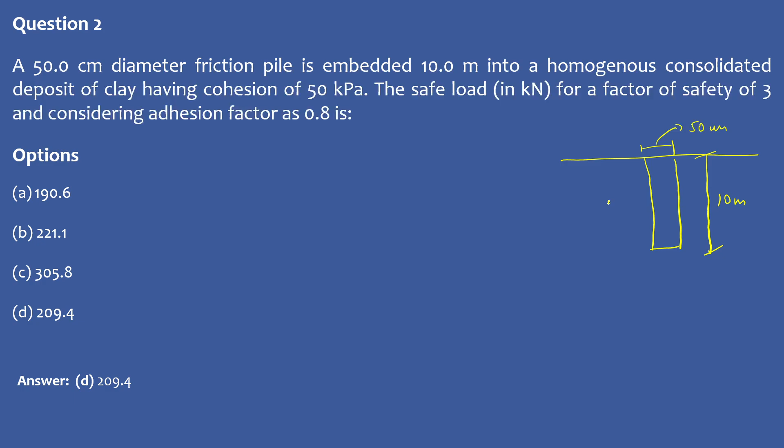So the case given to you is your pile foundation, which is embedded up to a depth of 10 meters. Here you are having a 50 centimeter diameter. The factor of safety given is 3, and your adhesion factor alpha is 0.8.

So usually the pile capacity is given to you as alpha. You need the safe load for the factor of safety. So it is given as alpha times cu times your surface area. So this is your pile capacity, P ultimate.

So alpha has a value of 0.8, your cu value is 50. Then you need to consider the surface area, given by 2 pi r, so which is pi into d, and d is 50 centimeters, so it's 0.5 meter. Then length is 10 meters.

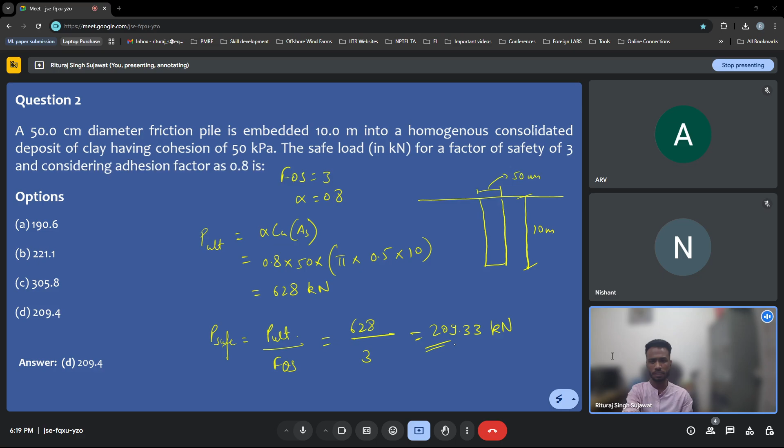So P safe is your corresponding value of 209.33 kilonewton. So this is your answer. Let's move to our next question.

For designing end bearing piles of a square cross section in clays having average unconfined compressive strength of 100 kPa, the net ultimate bearing capacity is... So one piece of information is it's an end bearing pile, resisting load from tip resistance. The cross section of the pile is square. You've been given the unconfined compressive strength, and accordingly you need to calculate the net ultimate bearing capacity.

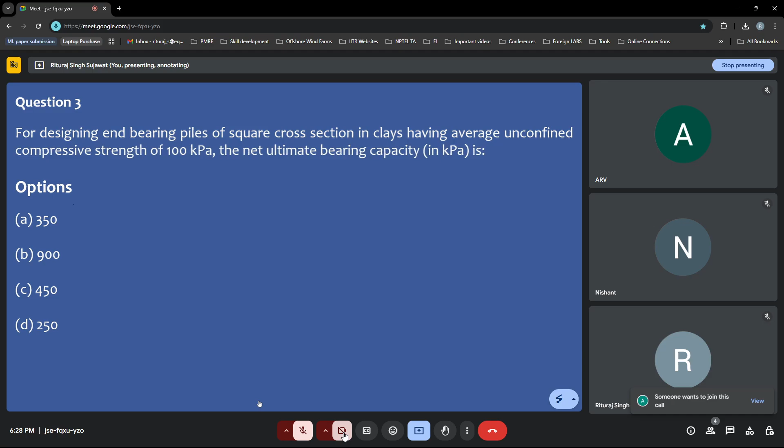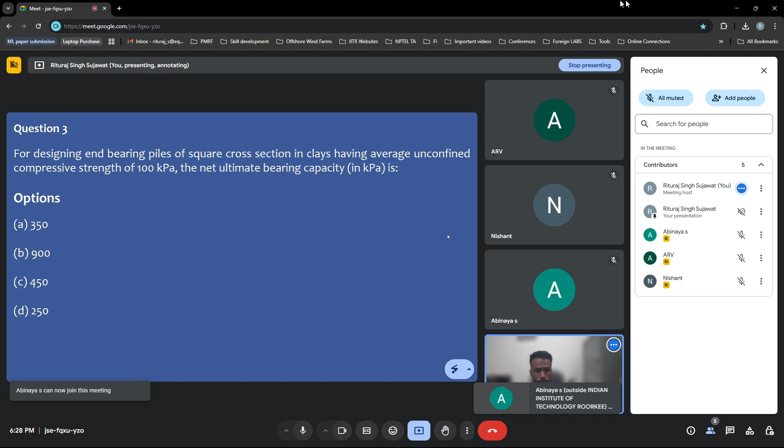Sorry for the delay. Let's check the answer for this question, which is 450 kPa. You have been given cohesive soil with unconfined compressive strength of 100 kPa. So your undrained shear strength Su will be 100 by 2, which is 50 kPa.

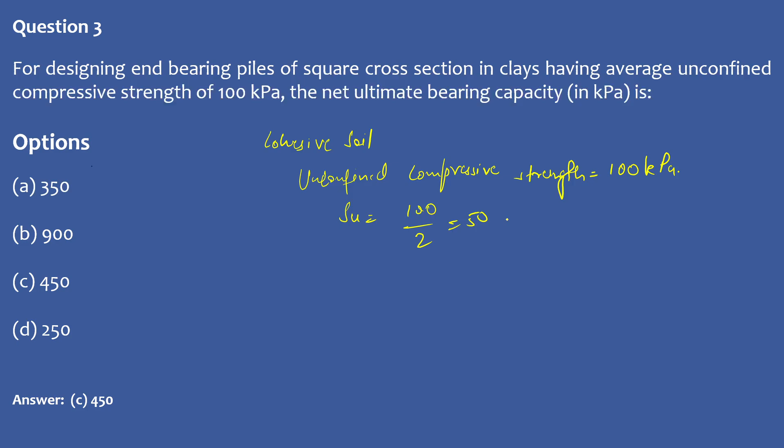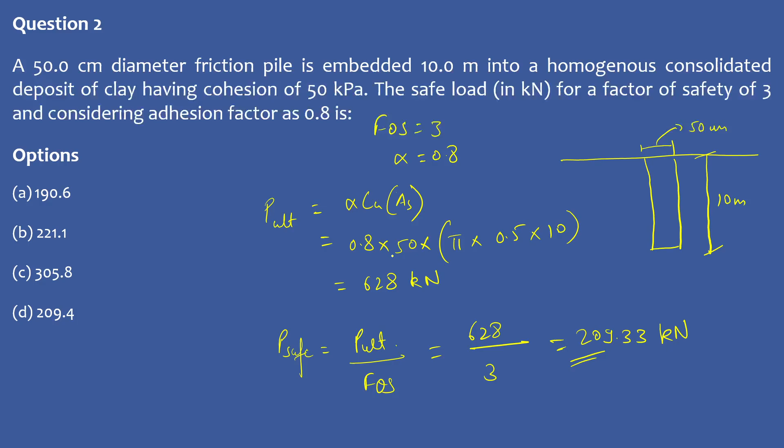The net ultimate bearing capacity, let me check the dimensions - square cross section with net ultimate bearing capacity. So Q is basically C times Nc. The Nc value we know from the previous part - the bearing capacity factor for piles is generally taken as 9.0. So your Nc value is 9.0 and C is 50. So your answer will be 450 kPa, which is option C.

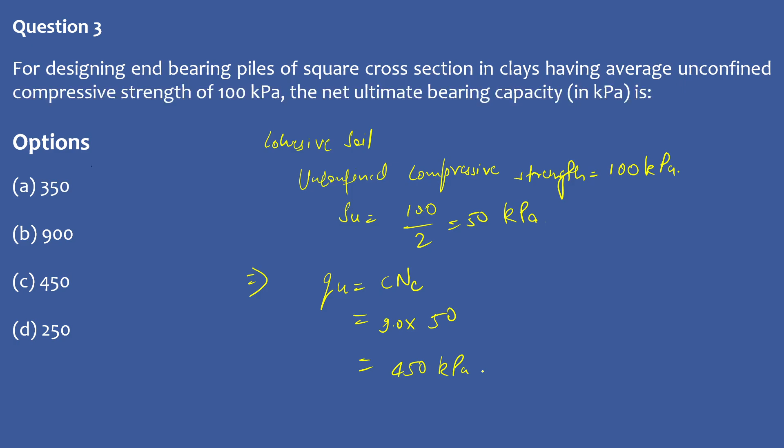I think this is straightforward. So let's go to the next question.

Next question: you are having a pile which is 10 meters in length. The diameter is 0.5 meter and it is installed in stiff clay soil. The Cu value given is 100 kPa, and the adhesion factor value given is 0.8. The pile load capacity furnished by friction only - you need to calculate what is the pile load capacity.

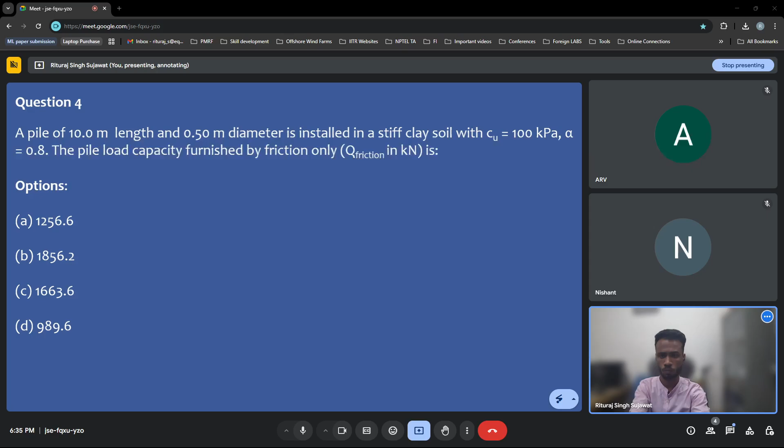Question 4A. Question 4.

It has been asked to calculate the capacity corresponding to the shaft friction. The correct answer is 1256.6, so option A. Let's check this - say this is your pile when subjected to some axial load. These are the tractions available at the surface of the pile and soil, corresponding to the shear stresses developed. We need to calculate the capacity provided by these shear stresses.

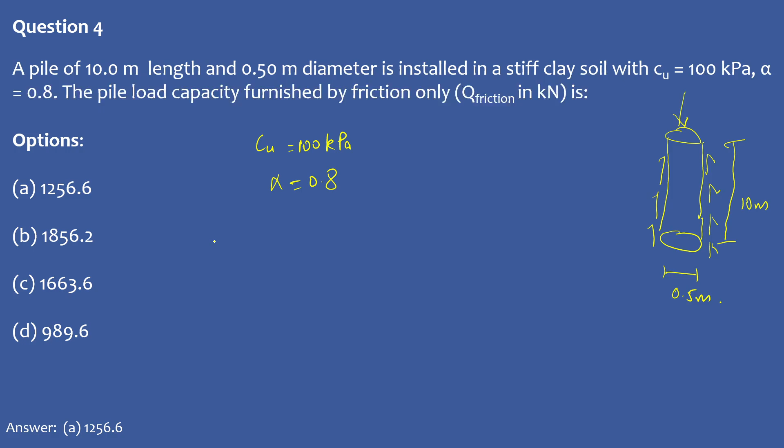So this is the Cu value, alpha is 0.8, the pile load capacity. We know the capacity corresponding to shaft friction is given by alpha times cohesion value, multiplied with the area of the shaft.

So this is alpha Cu S. Alpha is 0.8, Cu value is taken as 100, and area is calculated as pi D into L. So alpha is 0.8, Cu value is 100, pi value is 3.14, diameter is taken as 0.5, length is taken as 10 meter. So it's 0.8 into 100 into 3.14 into 0.5 into 10, which gives 1256 kilonewton. So the correct answer is A.

Let's move to question number 5. For the data given in question number 4, you need to calculate the ultimate bearing capacity of the pile, assessing it for the same data.

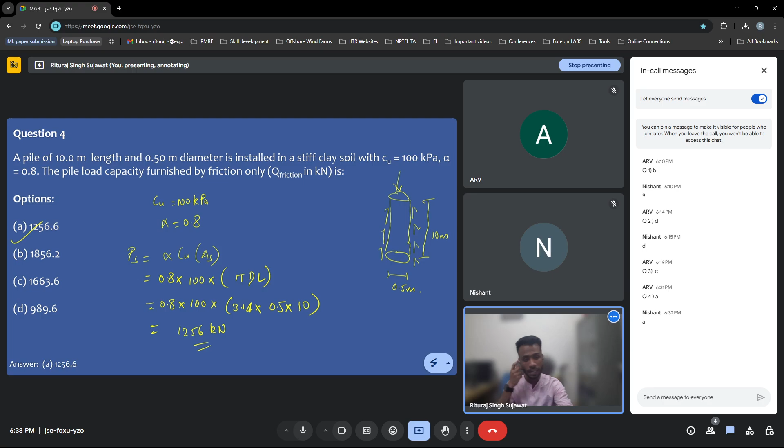The ultimate bearing capacity will take the end bearing capacity also into account. This is your data - you have already calculated the shaft friction capacity. Now you need to calculate the end bearing capacity, and then evaluate the total ultimate bearing capacity of the pile.

Sir, can you show the data once? Yeah. Sir, next slide, sir. Yeah.

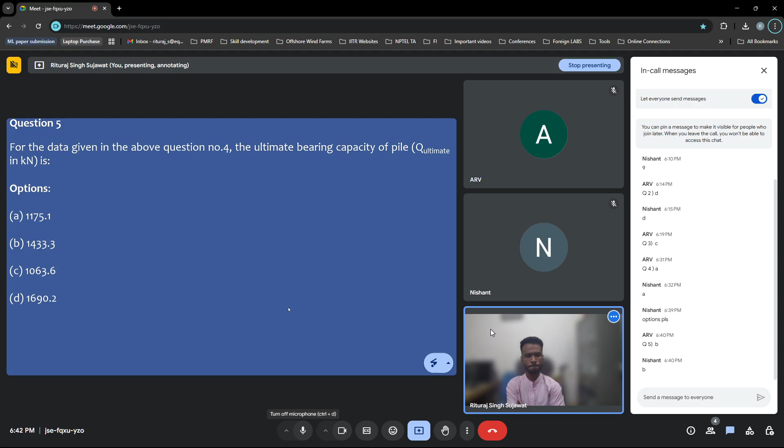Let's check the answer. The answer is 1433, so I think you guys have also got the same answer. We already have the value of shaft friction - Ps value is 1256 kilonewton. Now let's calculate the ultimate - we need to calculate P end bearing.

It is given by first taking the bearing capacity factor, then the capacity of soil given by Cu, and the base area of the pile. Nc for clay soil is 9, Cu is given as 100, and the base area is pi by 4 into d square. So it's 9 into 100 into 0.784, and diameter is 0.5 meter, so it's 0.5 whole square. Your P end bearing capacity is given by 9 into 100 into 0.784 into 0.5 square, which is 176.4 kilonewton.

So your P ultimate is given by 1256 plus 176.4, which equals 1432.4 kilonewton.

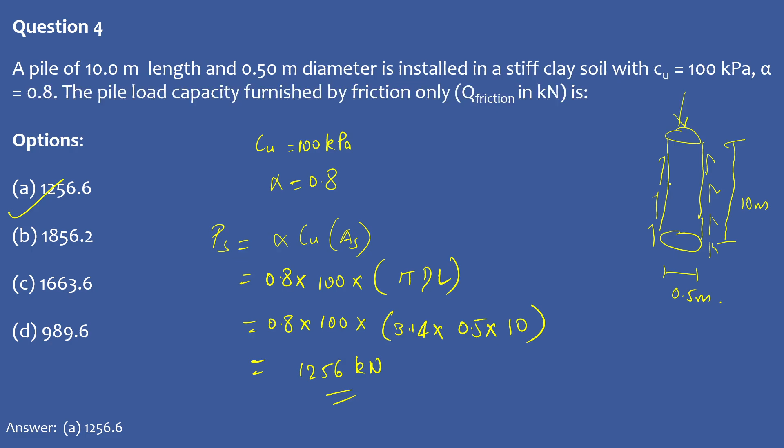So this shaft friction is resisting a load of around 1256 kilonewton, and the end bearing surface area of the pile is taking around 176.4 kilonewton. If we compare in terms of percentage: 1256 minus 176.4, so around 85... 176.4 divided by 1256, so 1 minus that, gives around 86% of the load transferred to the pile foundation is being resisted by your shaft frictional resistance. So this is a good observation you can make here.

So P ultimate is 1433.3 kilonewton. Let's move to question number 6. What is the critical depth of the pile? What is generally the critical depth of the pile considered as?

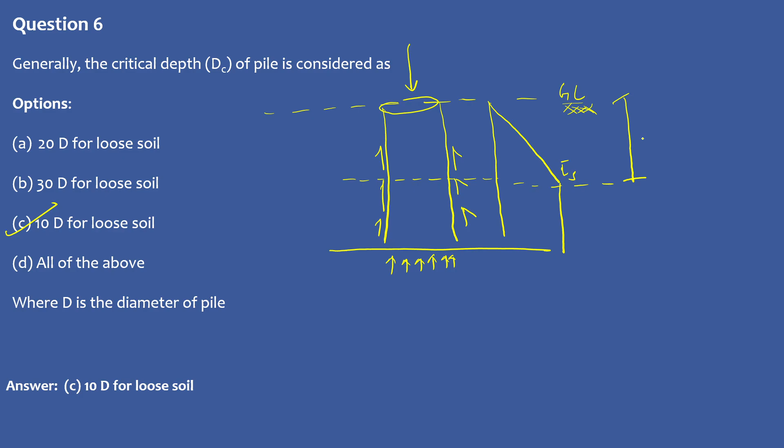If you see the increment of stress along the depth, let's say this is your ground level. When you further increase the load, after a certain depth your shaft friction will remain constant. So as you go along the depth, your shaft friction, let's say this is tau s, will become constant after a certain limit, and there is no further increment in the stress as you go along the depth. So we can utilize only this particular depth for the embedment to resist the vertical load coming over. This particular value is known as your critical depth, and this critical depth has a value of around 10 times the diameter of the pile, usually for loose soil.

This is the thumb rule, or the observation made by researchers during investigation in laboratories as well as in field testing. They have found that up to 10 times the diameter as the embedment depth, you will be having increment in the shaft friction capacity. After that you won't be having any further increment in capacity. So we can cut down our pile up to that particular depth, and this is how the embedment depth is evaluated, like how your critical depth is determined. So this is the answer for question number 6.

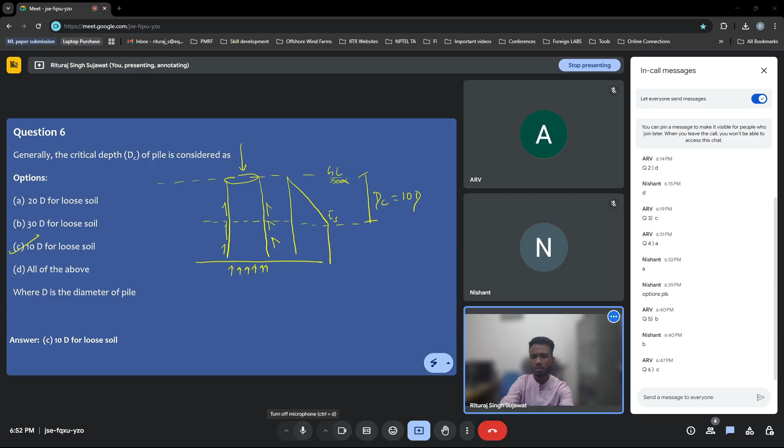Let's move to question number 7. Questions 7 to 10 are based on this particular data, so you can note down this data somewhere, and one by one we'll solve these questions. You have been given a 10-meter long pile. The diameter of the pile is 500 mm. It is driven in a uniform deposit of sand. The phi dash value is given to you as 40 degree. The gamma value is given to you as 18 kN per meter cube.

The gamma sat value is given to you as 20.5. The gamma W value is given to you. The NQ value is given to you. The K value is given to you. The interface frictional angle is given to you.

The design is to be carried out ignoring the critical depth concept. So you need to ignore the critical depth concept.

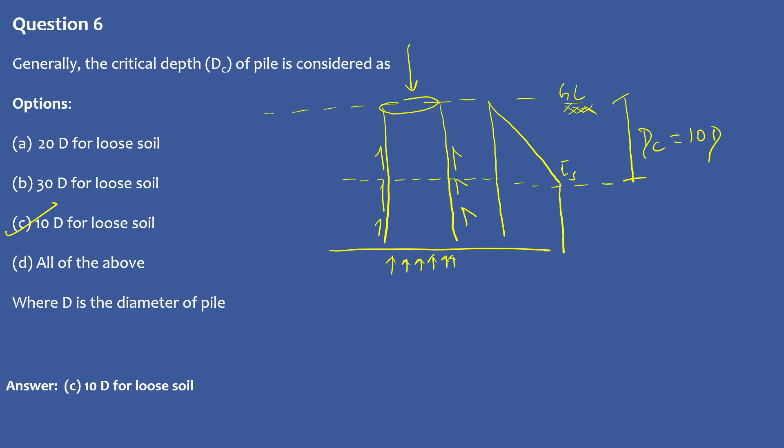So the first question in front of you - till now whatever questions you were dealing with was the calculation of the capacity of the pile in cohesive soil. This section deals with the calculation of capacity in cohesion-less soil. It's a uniform deposit of sand, and all these parameters are given to you.

So if the water table is at a great depth and is not likely to rise, the pile load capacity furnished by friction only is - water table is at a very large depth, and you don't observe further increment of the water table. Then what is the pile load capacity furnished by friction only?

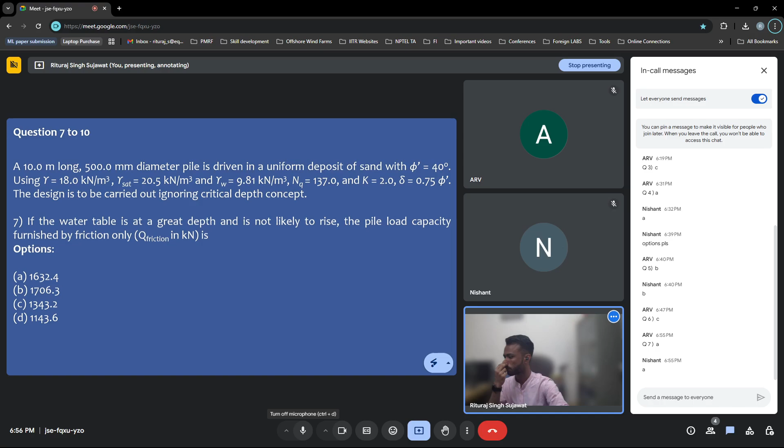So let's check the answer. It's 1632.4 kilonewton. So I guess both of the two answers we got is option A.

So let's see this. Say you have a certain pile foundation embedded up to a depth - this is a 10-meter long pile, and the diameter is given as 0.5 meter. The phi dash value is 40 degrees. The gamma value is 18 kilonewton per meter cube. The gamma sat value is 20.5 kilonewton per meter cube. Gamma W value is given as 9.81, and NQ value has been given as 137, and then K value is 2.0, and your delta is 0.75 of phi dash, which is 0.75 of 40 degrees, so 30 degrees. You need to calculate the pile load capacity furnished by friction only.

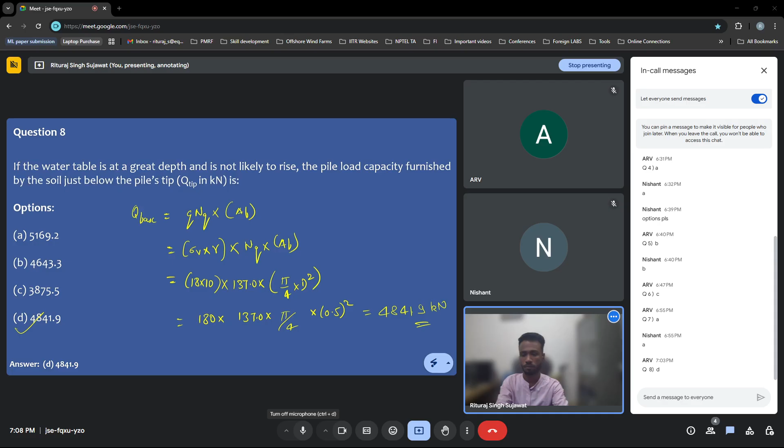So let's move to question number 9. I need to calculate the ultimate pile load capacity. This is simple - whatever value you got from 7 and 8, use the corresponding value for 9. Let me solve this, why waste time? So Q ultimate is your Q bearing capacity and the Q shaft friction.

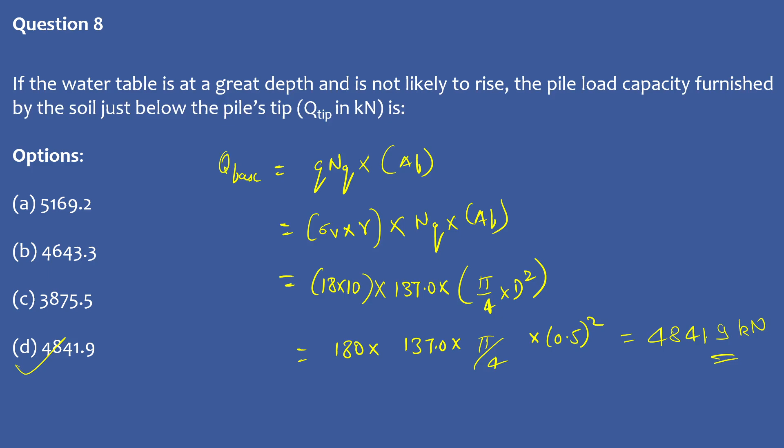So your Q base value is 4841.9 and your Q shaft value is 1632.4. If we check this, it is 6474.37, which is closer to option B. So the correct answer is option B, question number 9, 6474.3 kilonewton.

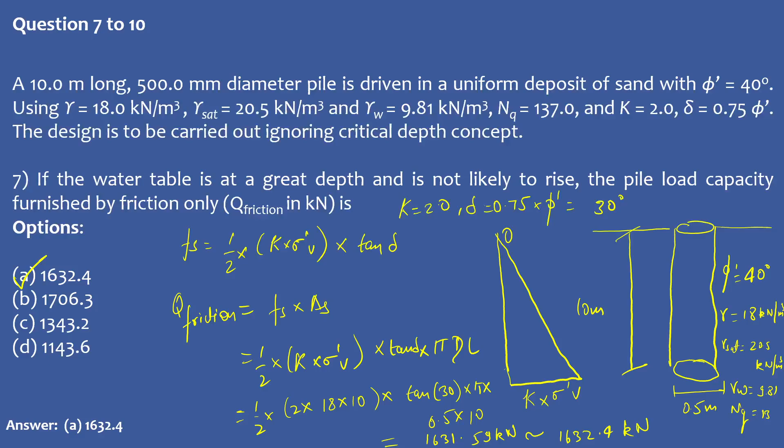Then let's move to the final part. Till now we were not having the water table effect, but in this part we are also introducing the water table, present at 5 meter below the ground surface. The pile load capacity furnished by the soil just below the pile tip - here the water table is 5 meter below the ground, your embedded length is 10 meter, so it's at the half depth of the embedded length of the pile. The gamma sat value is given, the gamma water value is given. You need to calculate the pile load capacity, the end bearing capacity of the pile.

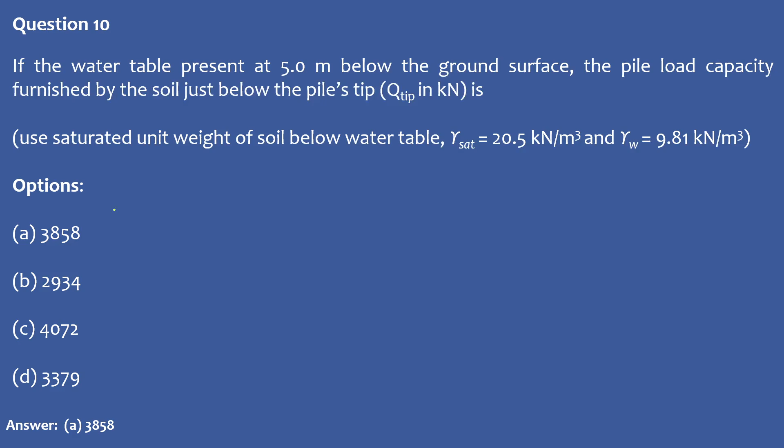So let's check the answer. Answer is 3858 kilonewton. Let's say this is your pile which is embedded in the soil, and you are having a water table. This is your 5 meter depth, this is your further 5 meter depth. So you are having the groundwater level which is available at 5 meter depth.

This is your ground. So you need to calculate how much is your pile load capacity. Your Q tip is basically the frictional base resistance multiplied with the area of the base. So for calculation of the frictional base resistance you need to calculate how much is your effective stress available at this level, at your tip level. So for that you need to calculate your sigma dash vertical.

The k value, is it given to you? No, you don't need k value in this. It's basically q and Nq, so you need to calculate the overburden. Your nq value is 137, and for calculation of the q value, it's basically 5 times your gamma... sorry, gamma dry, yeah. Gamma dry is given to you as 18 - yeah, it's gamma bulk we need to take. So 5 into 18, plus your gamma submerged, so the saturated value is 20.5 minus gamma water which is 9.81, and this particular depth is 5 meter.

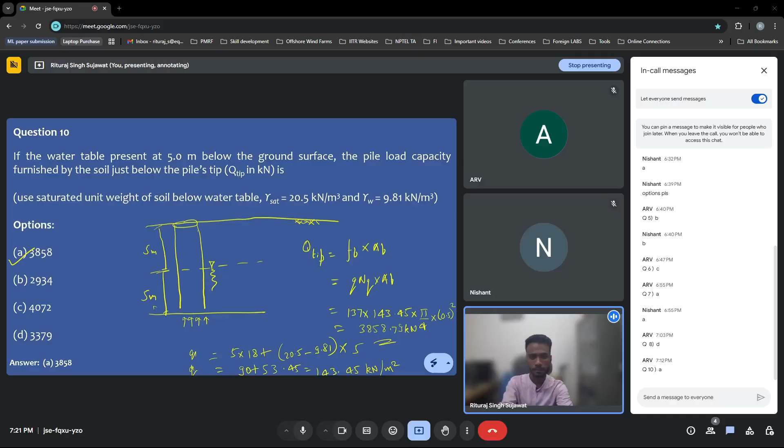Any doubt in this, guys, so far? Then let's move to our next set of questions. Let me open this.

So this is a theoretical question about the function of the pile. What is the usual function of the pile foundation? Whether it is for carrying vertical load, to resist uplift load, to resist horizontal and inclined load, or all of the above?

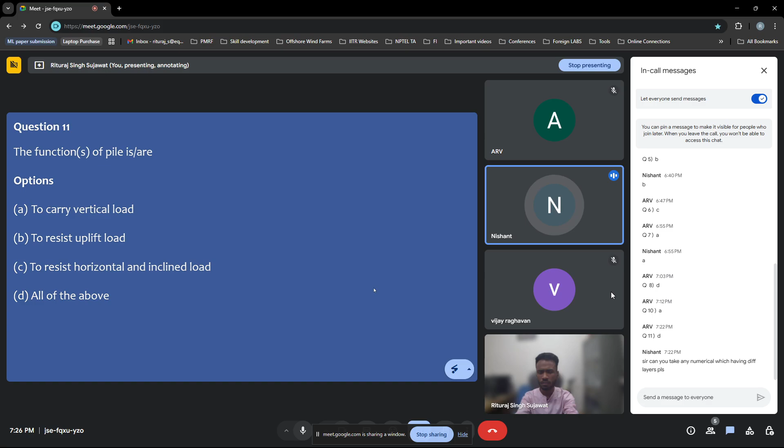So meanwhile, you can take question number 11 and then we can... Sir, can you explain question number 7 once again, like the methodology only?

Okay, just let me check. Question number 7th. Window. This one.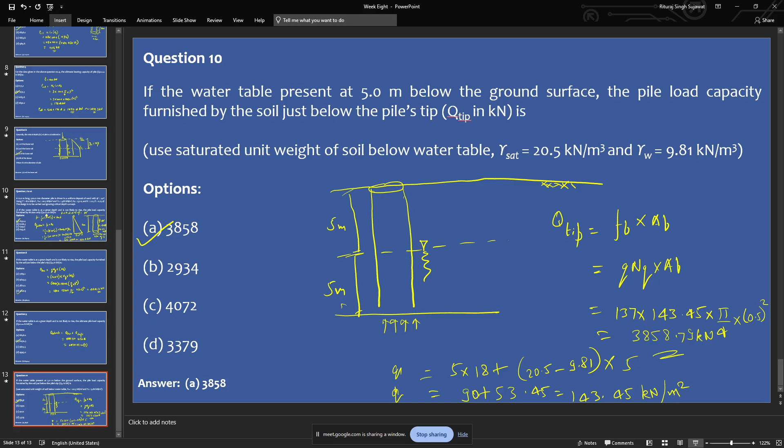Yes sir, okay Nishant. So in this particular question, you have been asked to calculate the shaft friction value, right? This shaft friction value is basically, if you would have read the concept in our physics 11-12 class, so let me add. Okay, seventh question. Insert new slide.

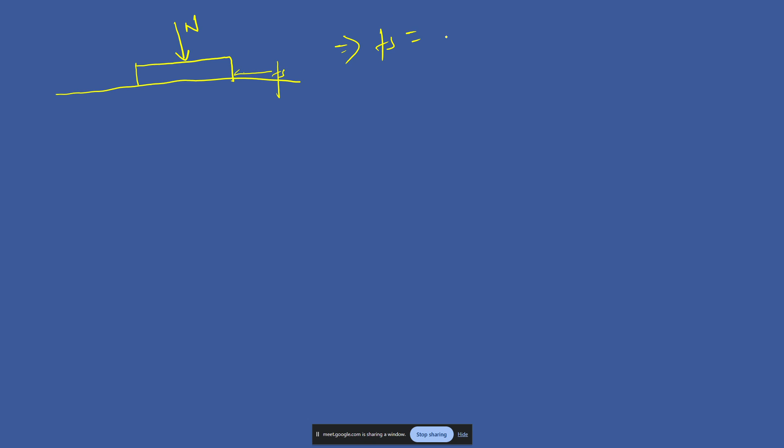So usually when we deal with questions of frictional values, let's say if you are having a horizontal surface, and a certain block, and you are applying some normal load over it, you want to calculate how much frictional force is available here. So at this particular level, this fs, this frictional force value, is usually given by the coefficient of friction times the normal force acting on that.

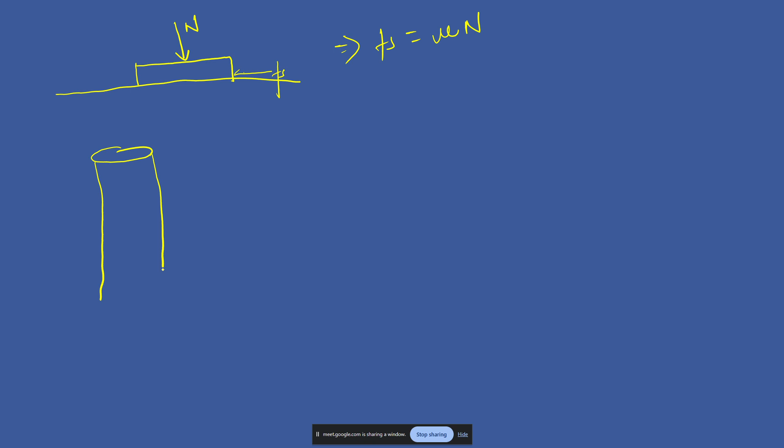So taking this particular analogy, let's say if you are having a certain pile foundation, and there is soil around it, surrounded by the pile, right? Now I want to calculate how much shaft friction is acting on that. So for calculation of this shaft friction, first I need to evaluate at this point how much normal force is acting. Let's say it's Fn.

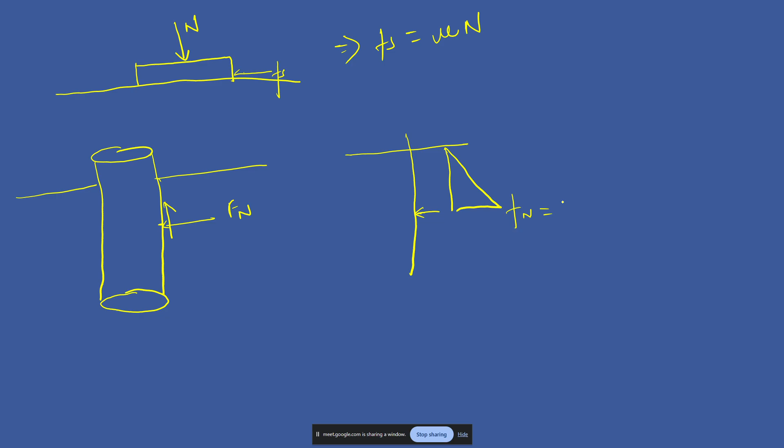In soil mechanics, if you see this, let's say if you are having a certain ground, and I want to calculate how much confinement is acting, or the normal force, whatever vertical stress is available here, it's mu times... it's your frictional force, normal stress. So it's basically Fn is k times some coefficient value, multiplied with the vertical stress.

And for calculation of the shaft friction value, you will just multiply it with the coefficient of friction. So this is your frictional value, sorry, this is your vertical stress value. To convert this into the normal force acting on the pile, or the normal stress acting on the pile, you multiply it with some k value, and this value when multiplied with the coefficient of friction mu gives you the shaft friction acting on this. So this total value is Fn, and this total value is your Fs.

So mu in terms of soil mechanics is given by tan delta. Similarly, for calculation of the shaft friction value, throughout this step, you will calculate how much is your effective stress, or how your stress diagram looks like. If you see the stress diagram, it looks like this, and to convert into the normal stress acting, we multiply it with k times sigma dash v.

Since this is a triangular distribution, what value do we need to take for calculating the normal stress? We will particularly take the average of this stress diagram, so that's why we have taken half times k into sigma dash v. So this is your Fs value, right? And now this tan delta is your mu value, and then you have multiplied with the area of the pile, which gives you the capacity corresponding to your shaft friction. So this is how you deal with this particular part.

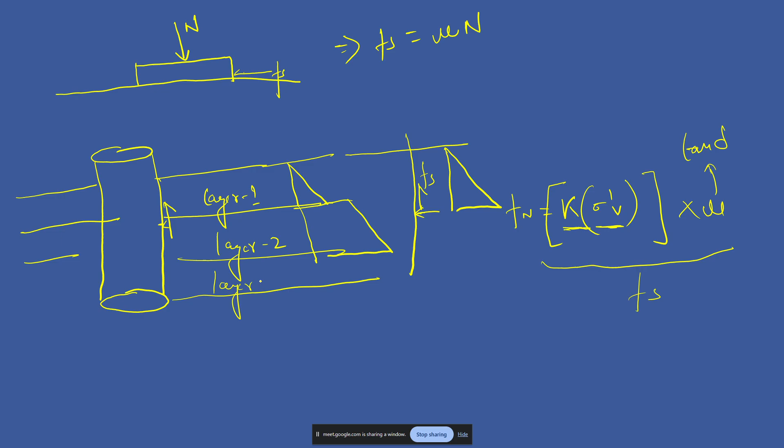So layer 3, you need to take the average of the stress diagram in this case, or you can also take the area of this stress diagram.

Sir, okay, so can you move to that question? Do we have the answer to question number 11D? Let me reshare the screen again. Okay, documents. Yeah, so I'll just reshare the screen again.

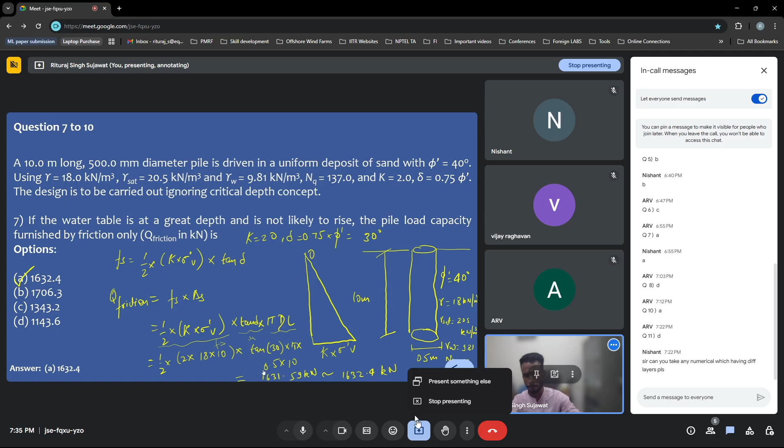So the correct answer for question number 11 is all of the above. The function of pile foundation is to carry the vertical load, which is P axial. Then let's say if you are having certain structures like towers, or high rise buildings subjected to high wind forces, or offshore structures subjected to high environmental forces, then your piles are also subjected to uplift forces, which is P uplift.

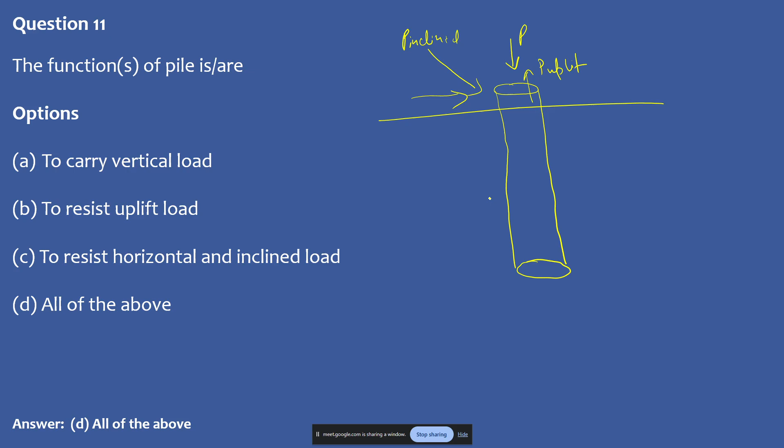Then in similar cases like wind forces, or in offshore cases, your pile is also subjected to horizontal load, as well as if you are having multi-hazard events with combined loadings, the total resultant force can also be an inclined load, P incline. So in all these particular cases, you basically use the pile foundation. So the correct answer is option D, all of them.

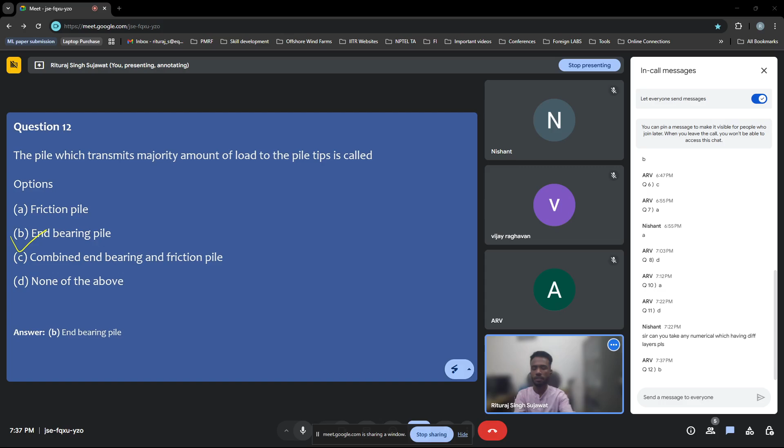Then let's move to question number 13. Okay, I think we have already taken this. The homogeneous consolidated deposit with a safe load with a factor of safety, I guess we also have dealt with such type of question. Yeah, it's also over. This also I guess we have taken.

Yeah, so 16 and 17 are somewhat new. No, so this is also a similar case, 16 or 17. Yeah, so we have dealt with such type of questions. Do we have any other questions?

But we still have some time, so I can show you a little demonstration of how we model pile foundation using numerical software. Let me take one example. Meanwhile, if you guys have any doubt, please ask. Other than the questions we have done today, if you don't have any, then I can give you a little demonstration of how we usually assess the capacity of pile foundations using finite element software. Yeah, I'll just be back within 1 minute.

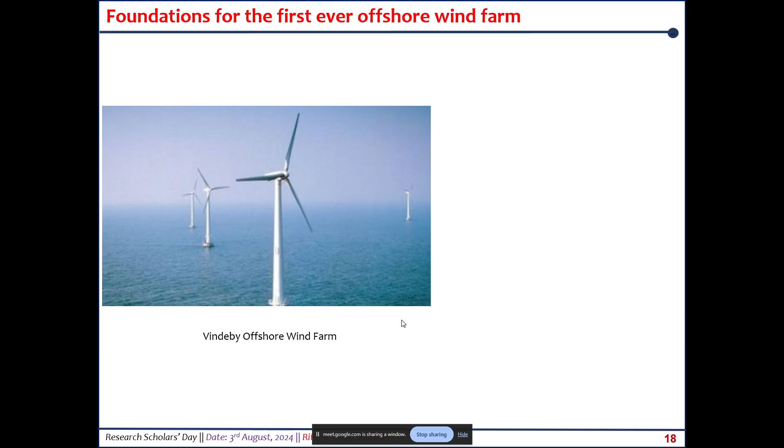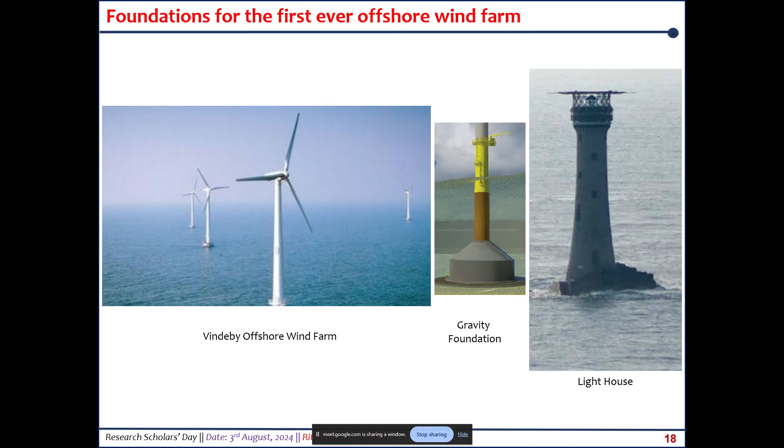So yeah, I'll just show you.

So this is how your typical wind turbine looks like. If you see these particular towers, the monopile foundation which is embedded in the seabed is around 0 to 30 meters deep. That 30 meters, you guys can imagine, is like a 10-story building, and the height above the ocean usually goes up to 220 or 240 meters. If we divide 240 by 3, that's basically an 80-story building you can imagine. So this is how the wind turbine height goes.

So usually for supporting this type of wind turbine in the ocean, they are subjected to high environmental forces - wind forces, wave forces, as well as seismic forces. Then you also have the frequency of the turbine contributing to dynamic forces on your foundation. So to resist all these forces, the most popular foundation used for wind turbines is the pile foundation, or what we usually call the monopile foundation.

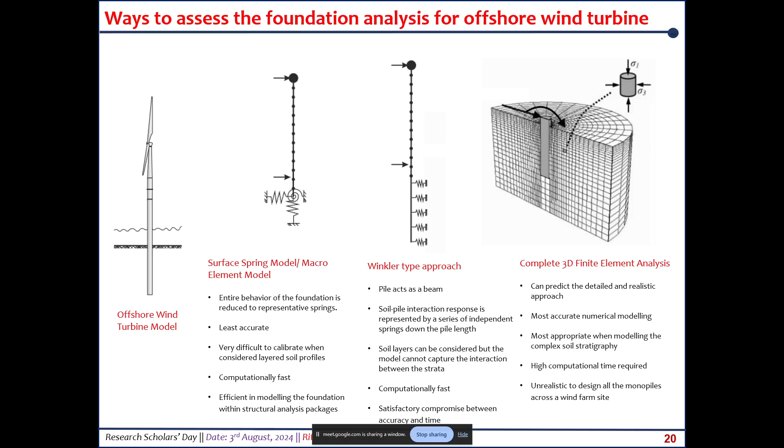So this is how the typical design works. Usually in the industry, people go with the Winkler beam approach, where instead of modeling with a continuum, they basically use springs. So currently the whole research revolves around how you particularly assess these spring coefficients.

If we see it from a logistics purpose or installation purpose, dealing in the offshore sector demands huge capital intensive projects. So you usually go with options which are more economical as well as feasible. That's why, though this pile foundation is of greater dimensions, compared to other alternatives it's one of the most efficient options for acting as a foundation for wind turbines.

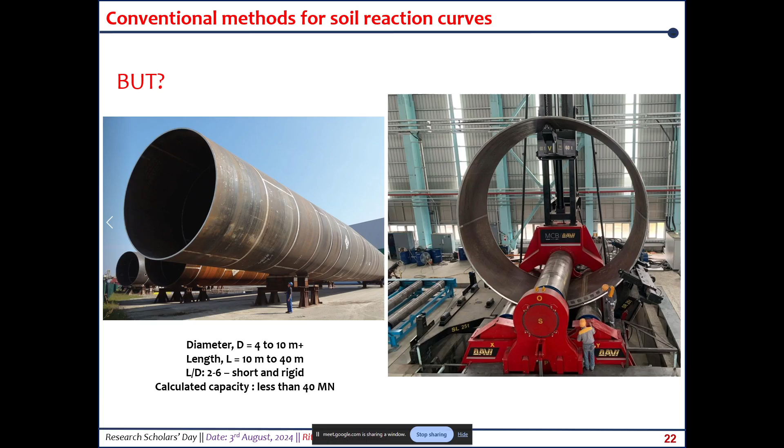So yeah, these are the different methods. Now there have been recent studies where we are basically trying to model these foundations and assess their capacity in different sectors.

So I'll show you one of my Plaxis models which I have developed. So yeah, this is how my typical model looks like.

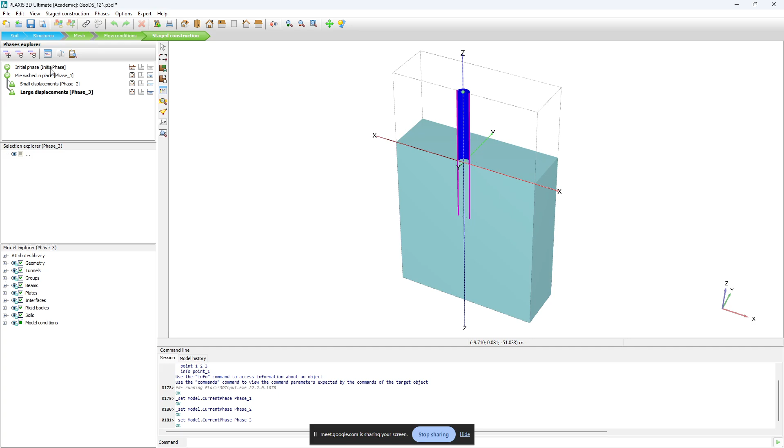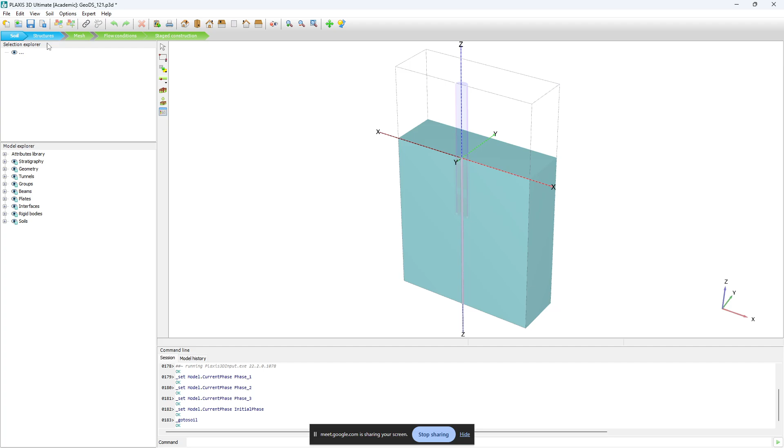In this particular case, first we have tried to model the soil. So this is the soil. Actually we have just modeled half of the geometry. Why so? Because we are just modeling the lateral load, and to exploit the symmetry of the system, we have tried to model only half of the geometry. So this is your soil system, and this is the structure, and this is your pile foundation.

Also you can see we have tried to introduce interface elements. This brown color element is basically the interface elements which has been introduced between your pile foundation and the soil. Whatever shear stresses we were calculating in our sample questions today - in theory we know how to do that, but in the continuum modeling approach, the software needs to know how the behavior is like when the pile is introduced to the soil. So this relative movement between your pile foundation and the soil, and the development of stresses due to that mechanism, can be taken into account with the interface elements. So these brown elements are basically your interface elements.

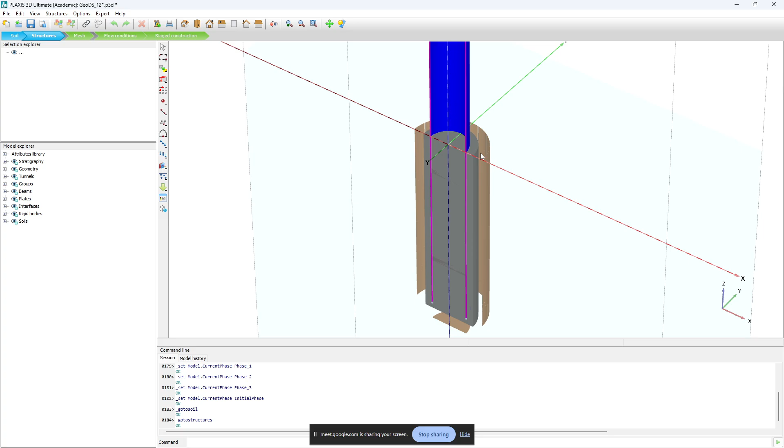Then again you need to discretize with the software.

What is the name of this software you are using? Plaxis 3D.

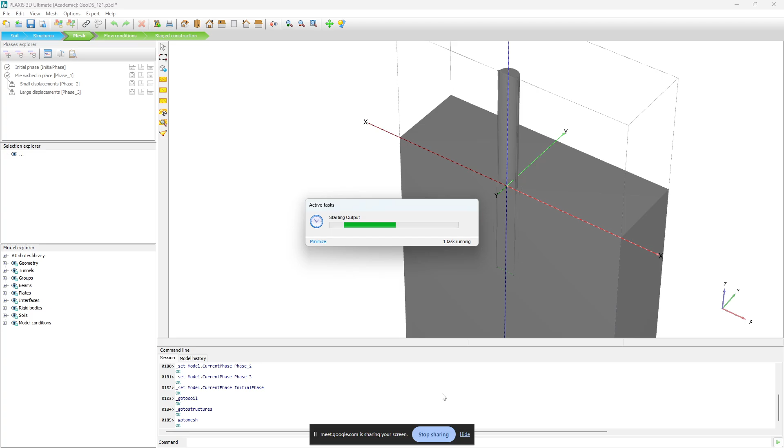Can we move further? So if we see, we have basically discretized the whole soil, and this is how your discretization basically looks like. So this is your pile foundation, then this is your soil domain, and this is your interface element which has been introduced between your pile.

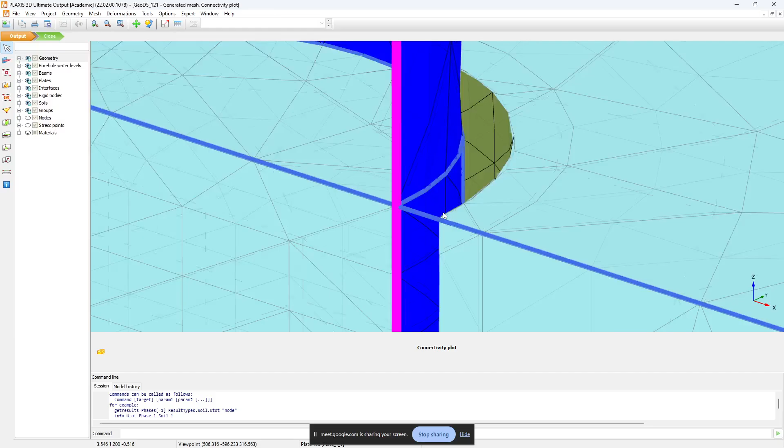Also we have introduced some of the dummy beams. These are the beams which have been introduced at the pile foundation. These dummy beams have very low stiffness, so when you try to assess the behavior in the pile foundation, these dummy beams can take account of this particular part.

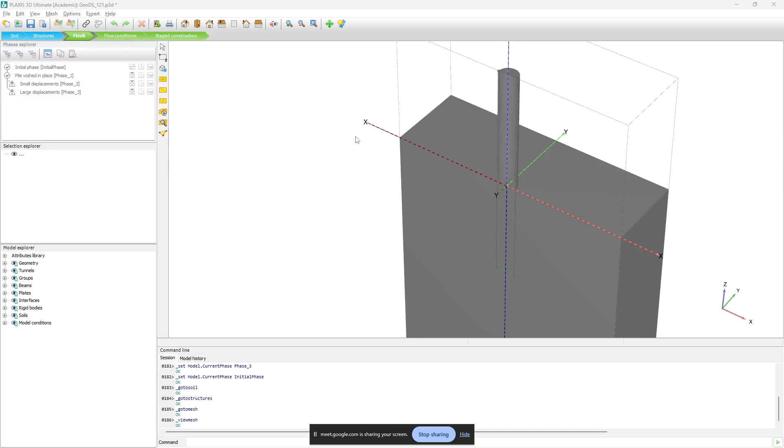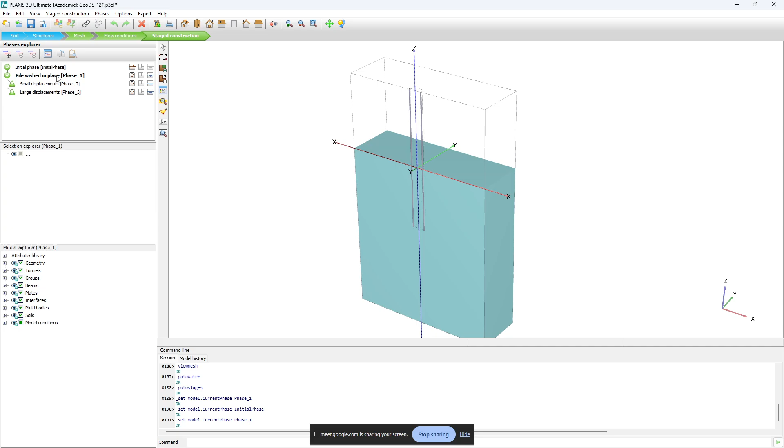And then you are having your staged construction. In our Plaxis modeling we'll try to introduce things one by one. So this is your initial phase where first we have introduced the soil, then the pile foundation. This is how it works on site also: first you introduce the soil, then the pile foundation, then you subject your pile foundation to certain lateral loads. So this lateral load, right now if we see the output of this particular model which we have developed...

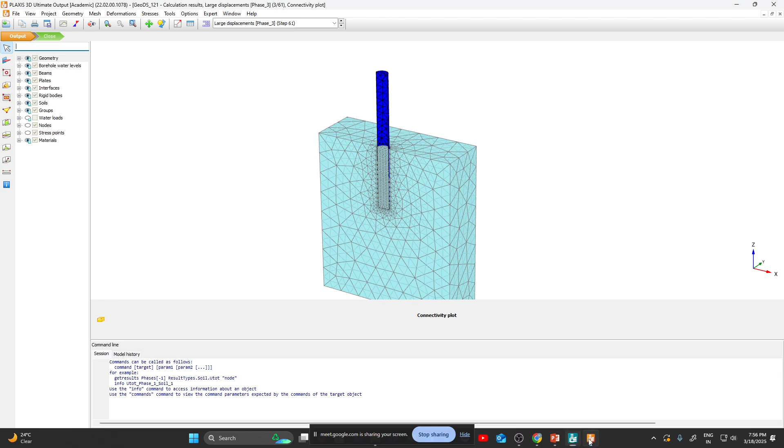So if we see the output of this model... you guys can see this deformation, right? So if I see the deformation, ux...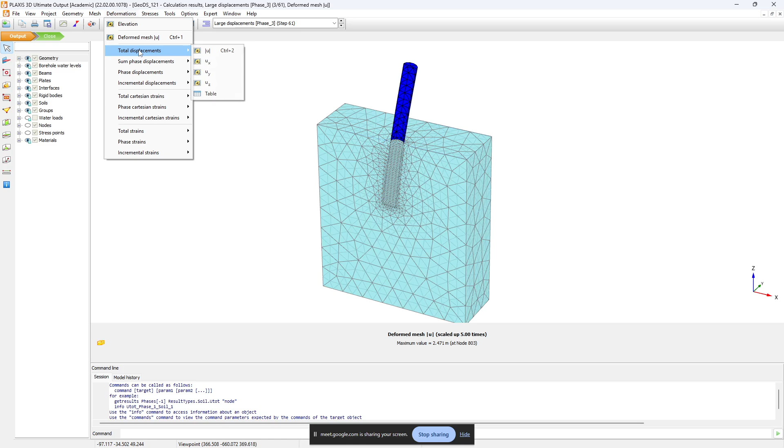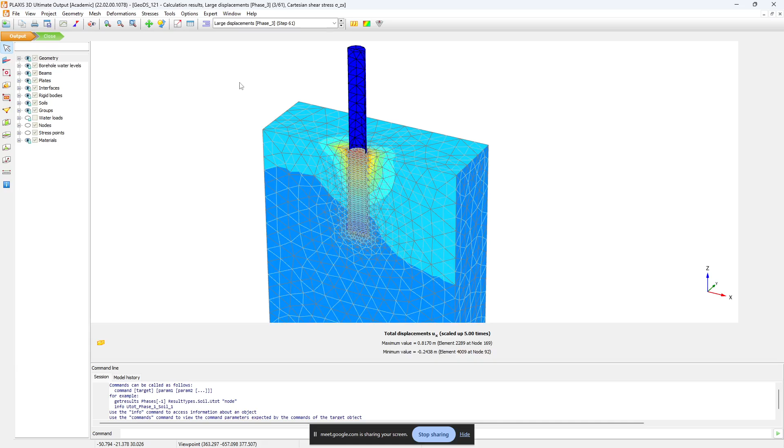Whatever stresses or displacement, this finite element software can directly give you that. So let's say we were calculating how shear stress or the tip resistance basically looks like. If I see sigma xz, these are the values of the shear stresses acting along the pile foundation. So at this interface, whatever shear stress values you are calculating with given Terzaghi's formulas or Meyerhof formulas, these capacities can be assessed with much higher accuracy using finite element software.

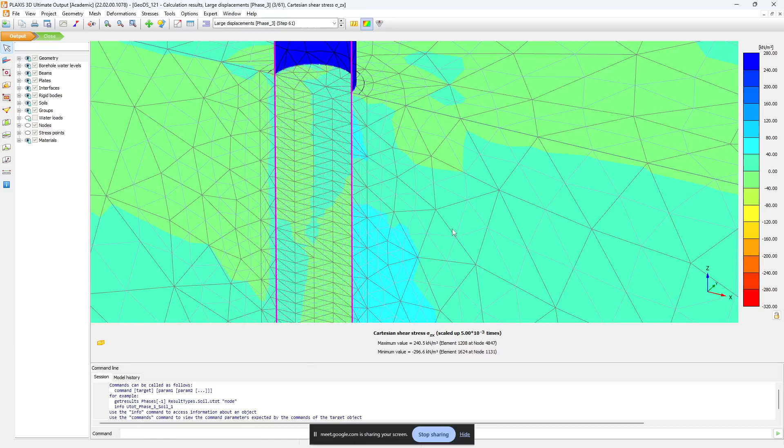Again, it depends how accurately you have developed your model. If you don't have a precise background of modeling, it's better to go with the theoretical or empirical relations which have been given, which we used in our tutorials or sessions today. So this is the tau xz, sigma zx value, which is giving you the shear stresses available at the interface of the pile foundation and the soil.

Then you are also having the Cartesian effective stresses, sigma dash z. Here you have the normal stresses acting at the base of the pile. Whatever tip bearing capacity or tip bearing stresses we are calculating in this software, we can evaluate using sigma dash z. Basically there we are assuming the behavior of the pile foundation is uniform throughout the base of the pile, but this is not really the case.

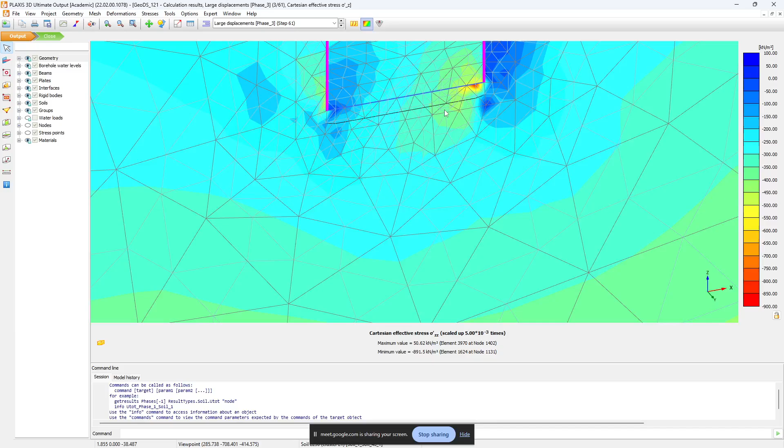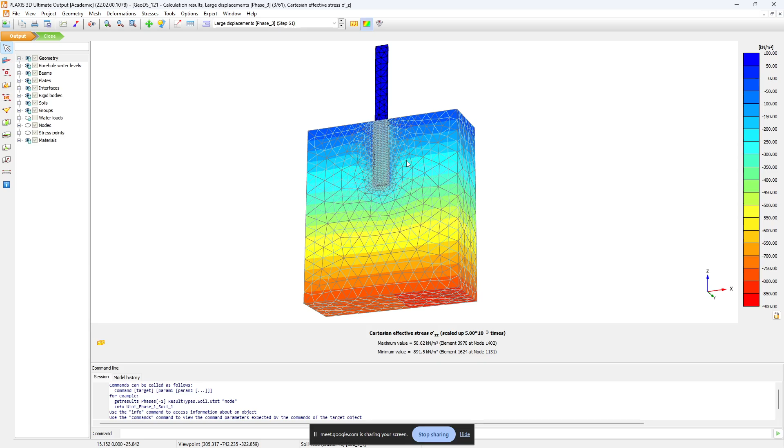When your pile is subjected to a certain amount of load, you can see there is some distribution of stresses at the base of the pile which is not uniform. So this is the way we basically go for the analysis of the pile foundation. We have also seen a similar case for the shallow foundation in a previous tutorial, and this session I wanted to show how we assess the capacity of the pile foundation using the finite element model. I know it's very difficult to understand in such a small demonstration, but I just wanted to give you an intuition of how things work.

I think some of you have already worked on such platforms, and for those who are new to that, I just wanted to highlight this for them.

So if you guys have any comment or any query on whatever we have discussed in the finite element part, please feel free to discuss.